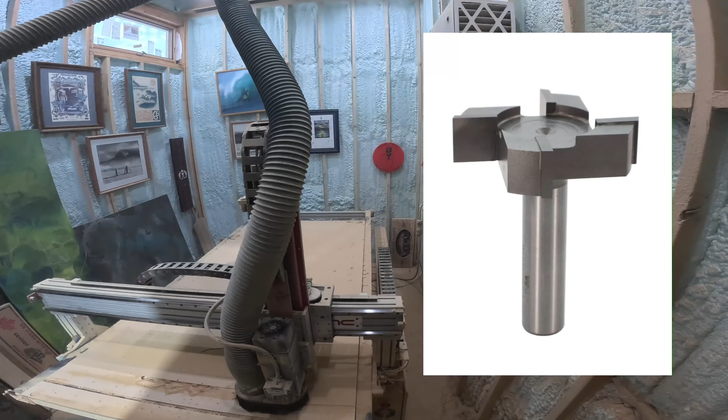Here you can see the vacuum system - it just doesn't keep up with it. This is a 2-inch surfacing bit, and I'll show you a picture of it. It just won't keep up with the dust, and it dusts this whole room out.

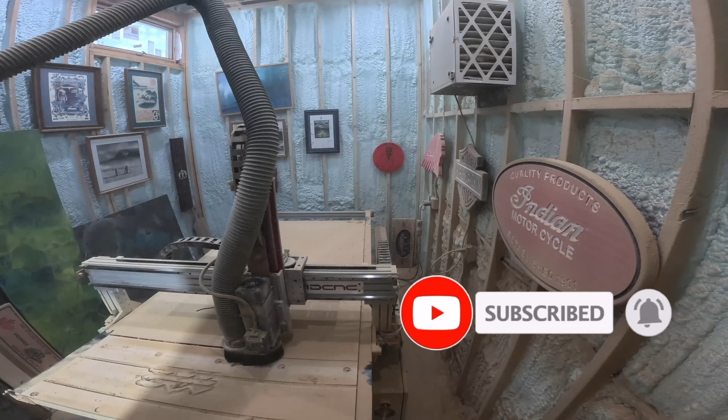You can see it's surfacing down to my original spoil board, and you can see the bolt holes right there. It's basically going down right above the bolts, just enough not to hit them. Then I'm going to glue a whole new piece on top of this and create the new vacuum board. I'll show you a picture right now.

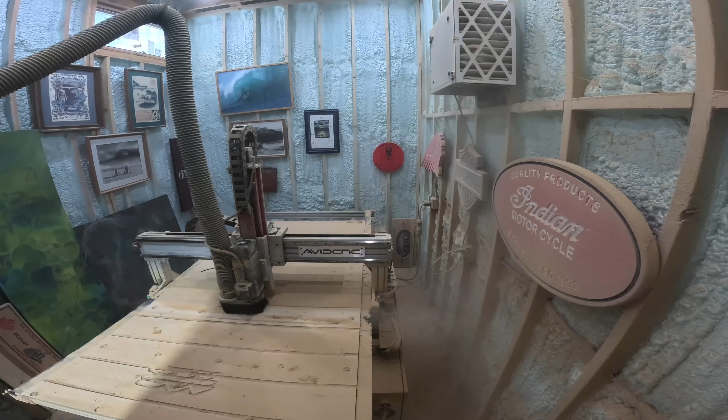We'll go into Vectric software, and I'll show you my 3D model of what I'm going to create for the top of this spoil board.

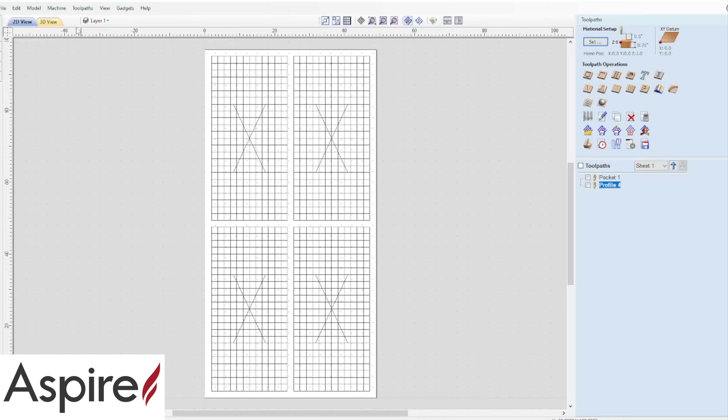Basically what I've created here - let's see where my holes are. Oh yeah, right there. I've just got two tool paths, and I'm basically going to use the same tool for both. Originally I thought about using a bowl bit, but I wasn't that impressed with it. So let me show you both these tool paths.

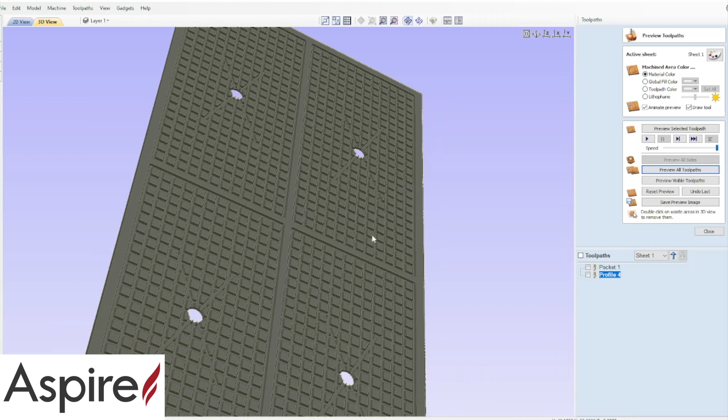We'll preview them - reset the preview and then preview all toolpaths. There you can see basically what I created. I'm going to just use one bit.

The first thing we're going to do is reset the preview, then run the pocketing toolpath. We'll preview this visible - this is going to basically cut the holes through it.

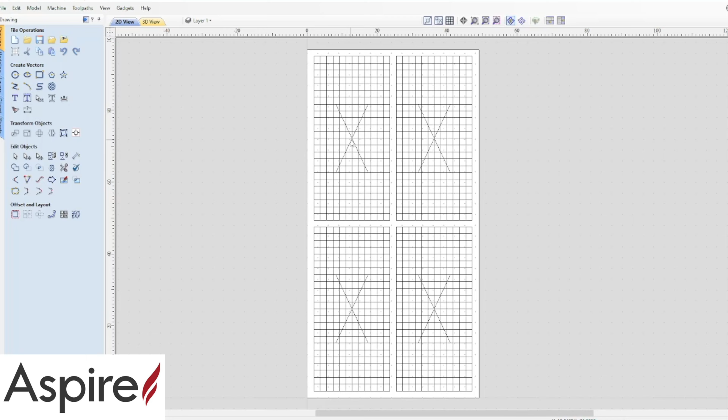Now let's go back over to the drawing for a minute. Originally, over in this 2D view, these holes right here - I had them just a hair too small. So I cut them, had to redraw them, and had to do it again. But I wanted it to be really tight.

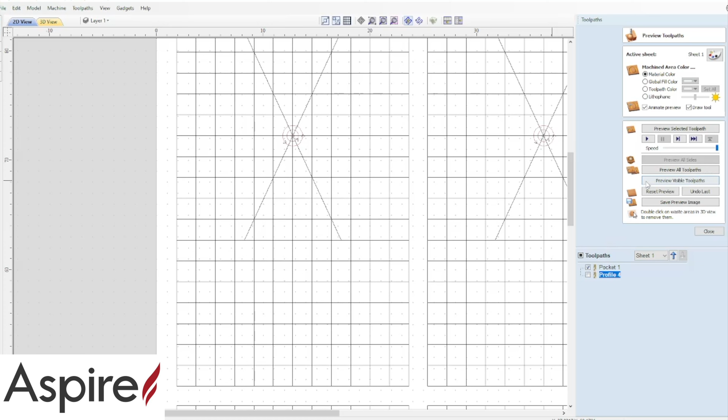So the 2-inch - here you can see the holes right there. That 2-inch hole was... preview visible. Oh, I'm on the 2D view, 3D view. This hole right here was just a hair too small, so I re-drilled it, recut it, and it's perfect now.

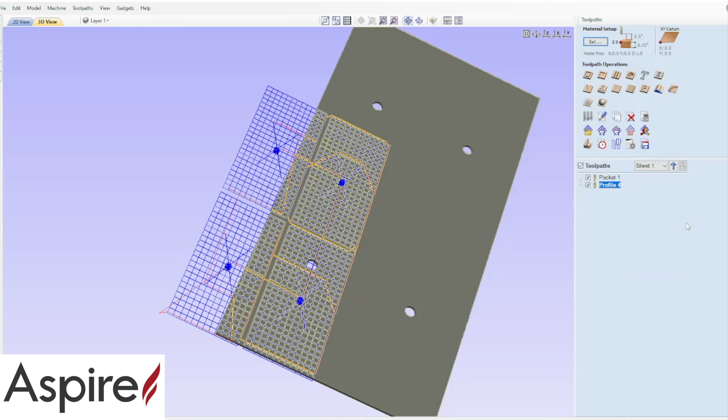So that was the pocketing toolpath, and then you had the profile toolpath. We'll go ahead and preview both of those - reset it, preview all. Basically this was all done with one bit, and I'll show you that bit right now.

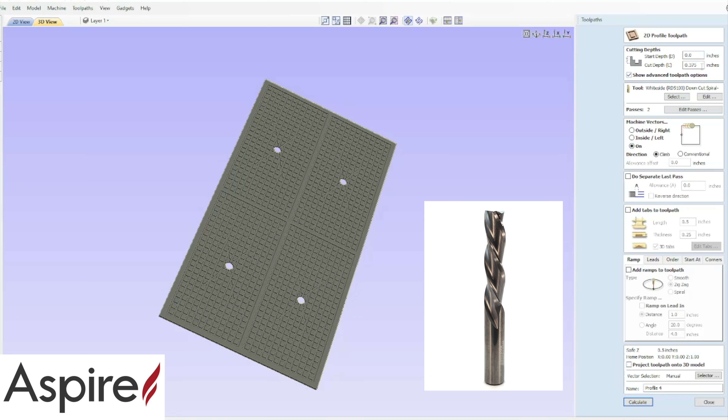This was a Whiteside bit, an RD 5100, and I'll show you a picture of it right here. I made two passes, ending up only about 3/8 of an inch deep - I didn't want it too deep. Most people run about a 1/4 inch wide, but I'm going to run it 1/2 inch wide and 3/8 of an inch deep.

I'll start off showing you the CNC cutting these 4 holes, then do a time lapse of cutting this whole thing out. If you want this file, just let me know and I'll send it to you. I did it all with one bit, and it really came out good.

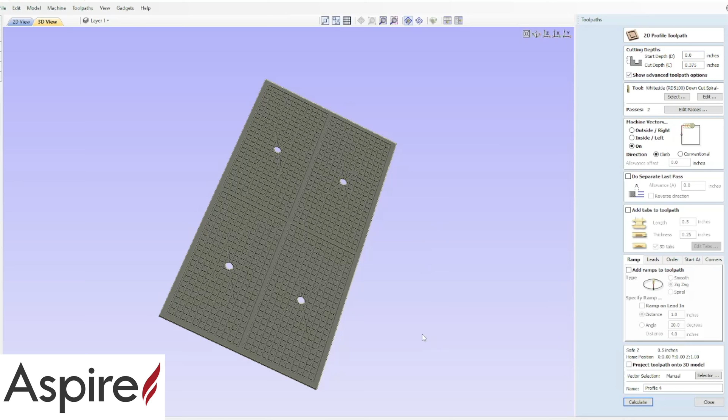Anyway, let's get over to the CNC. I'll do a time lapse of cutting this out, and we'll see if we can't get this thing done. Okay, the first thing we're going to do is change out this big spoilboard cutter bit.

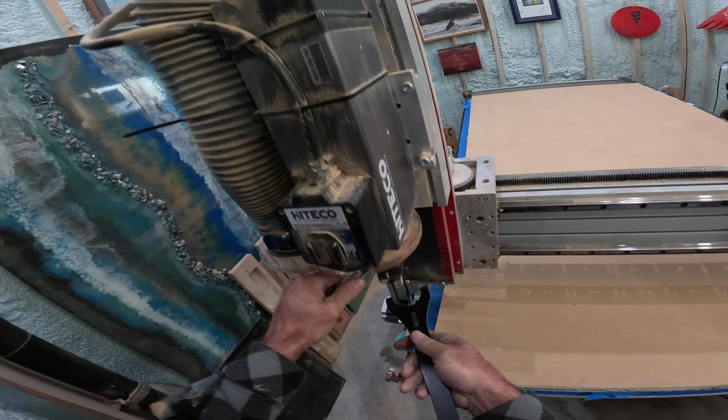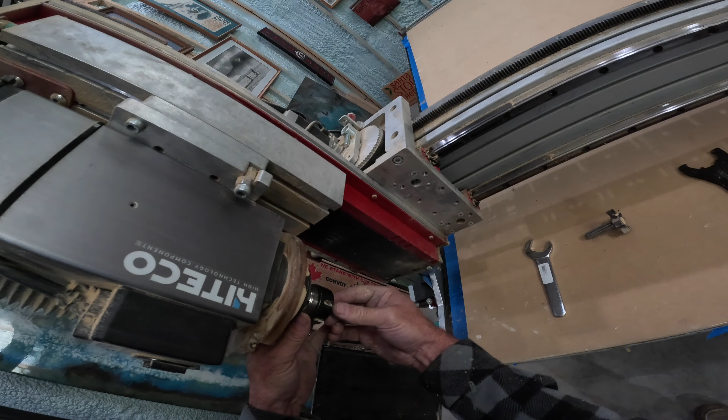And we're going to install this 5100. I didn't really show it, but this is a brand new piece of MDF glued onto my original spoil board. I basically used a lot of glue on both sides, glued this down and clamped it, put a whole bunch of weight on top, and let it sit overnight.

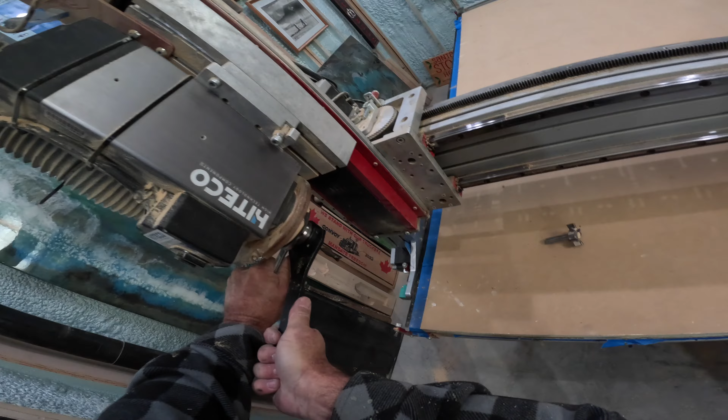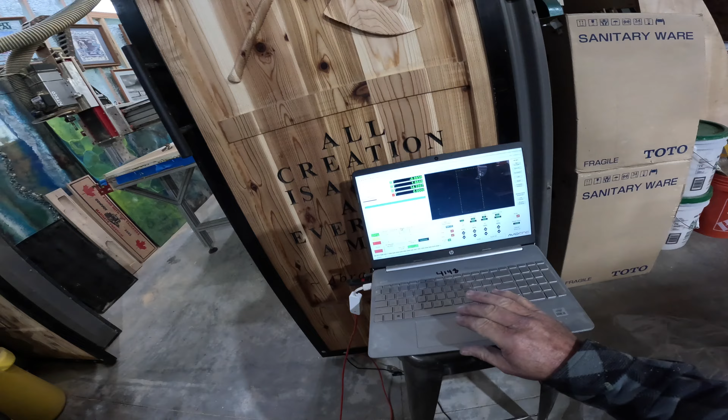You really got to put them on pretty tight. So that's all good. Now what we're going to do is come over here, bring that Z down, and do a touch plate here. Look at all that sawdust coming out. Take the soft limits off so I can go down further. Okay, we're going to put the touch plate over here.

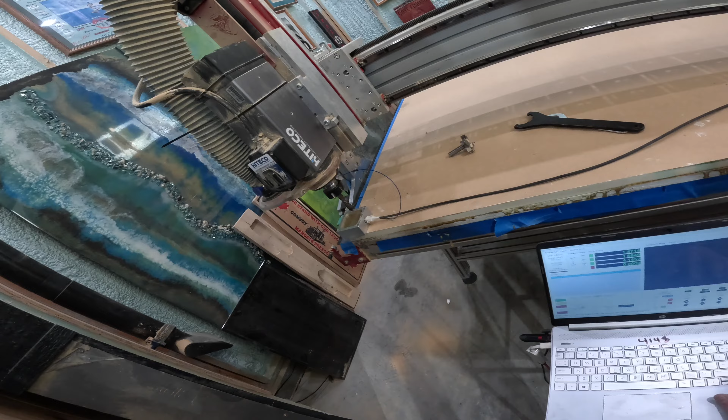I'll do a little jog in here. Bring this over closer. Okay, there, we're right in the middle. So we're going to start off.

We know that the diameter of this bit is a half inch. So we're going to go auto touch Z. We'll type in 0.5, and we'll go ahead and start from this corner. Now it's going to come down and touch that plate.

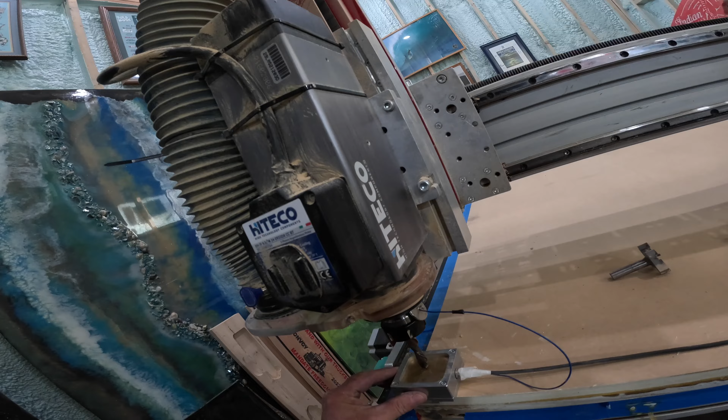And then it's going to do the XYZ. Now I believe it goes that way first, so you can see it's headed there. Then we want to turn it to the X position, and we'll come across. This ensures that you put these holes in the exact spot, basically referencing off your material.

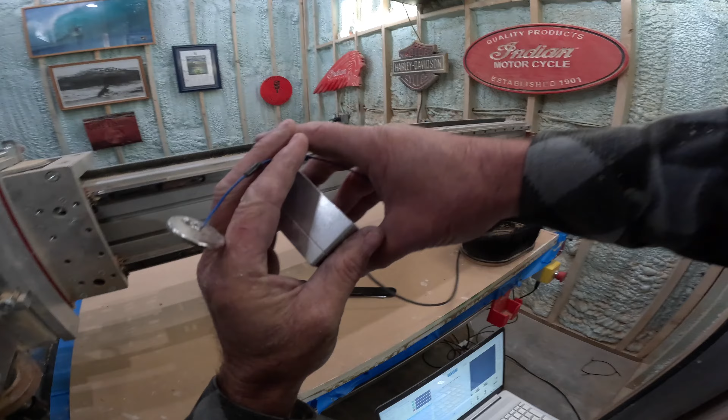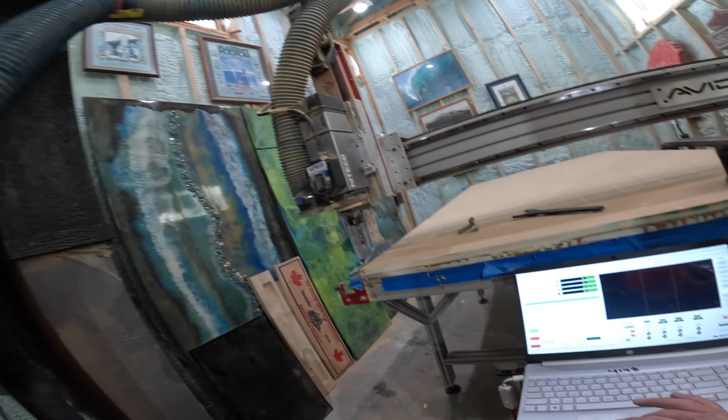Okay, the touch plate's all done. The next thing we're going to do is load the program. First we're going to raise this up a little bit because I got to put my vacuum. Need to put this vacuum thing back on. And then we're going to go up here, enter the file.

Open G-code. We know it's this pocketing toolpath. We'll open it up, and you always want to make sure and look and see what it's doing. That's all good, but first thing we need to do is warm up our spindle. So we're going to go ahead and warm it up first, and it'll start spinning for a few minutes. Okay, the warm-up is complete.

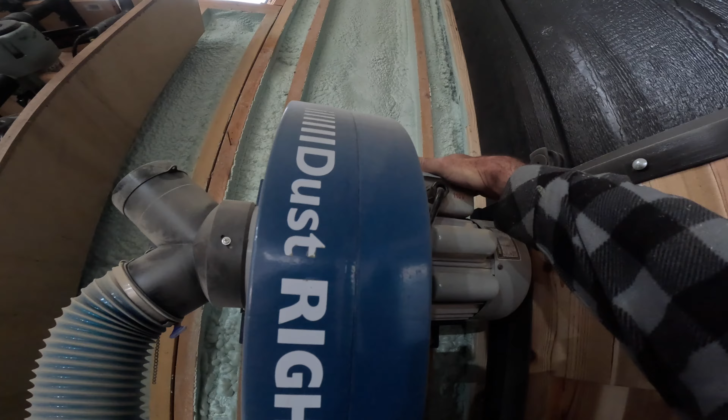We're going to go ahead and get our vacuum going. Make sure we got good suction.

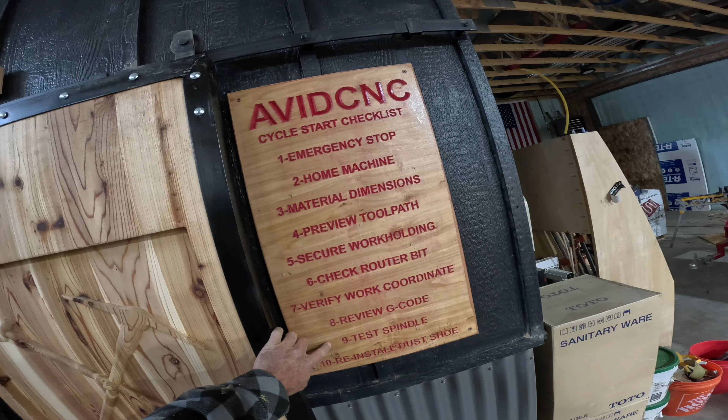And we've already, let's check our checklist. We know where our emergency stop is. We homed the machine, checked our material, previewed the tool path, secured the work holding, checked the router bit, verified the coordinates, reviewed the G-code, tested the spindle, reinstalled the dust shoe. So we're ready to go. Here we go, we're going to hit cycle start, and hope for the best.

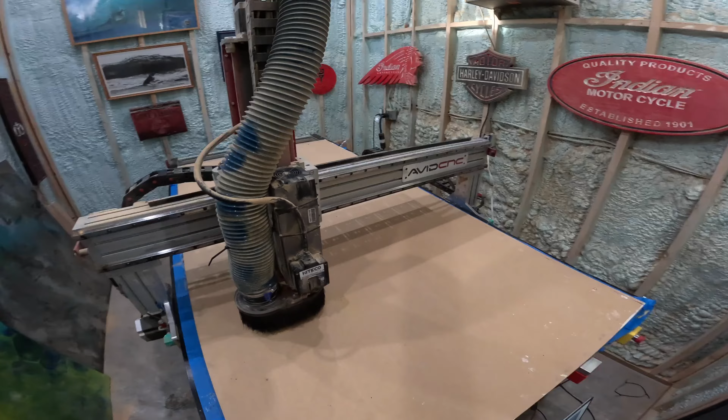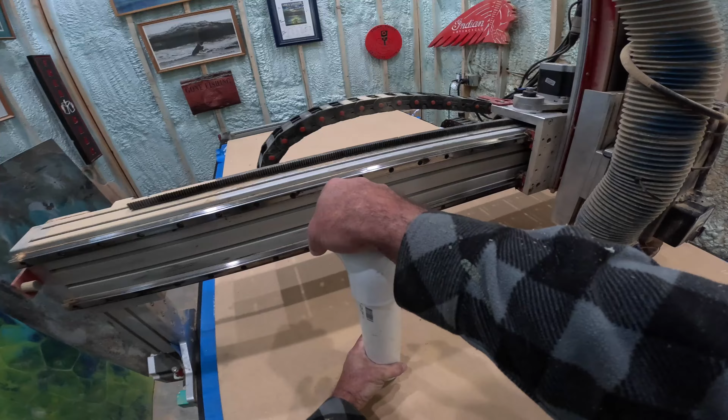Here's where I find out that it's just a little too tight to go in there. So I had to let it run to drill all four of those holes, and then I redrew the circle just a hair bigger, and the next go around it fit perfect. Just a little bit.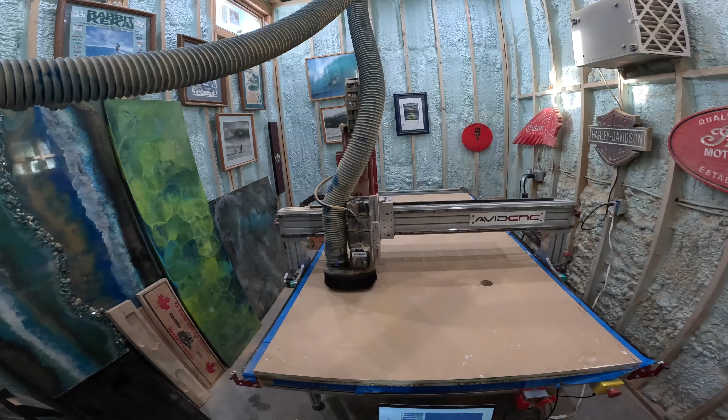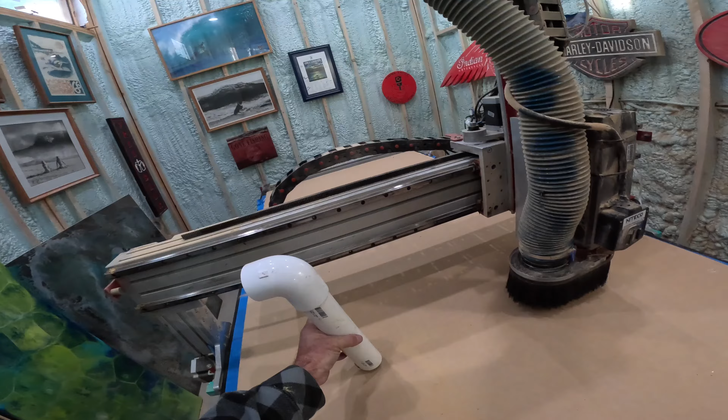And here you can see it fit just perfect, nice and tight. And that's going to be good for this vacuum table.

Once the holes were done, it was time to do the grid. I set my GoPro up to do a time lapse. I didn't realize how much battery it would take and how long it would take. It didn't take that long, but it took a few hours to do this whole grid, and I think it ran out of batteries right around here.

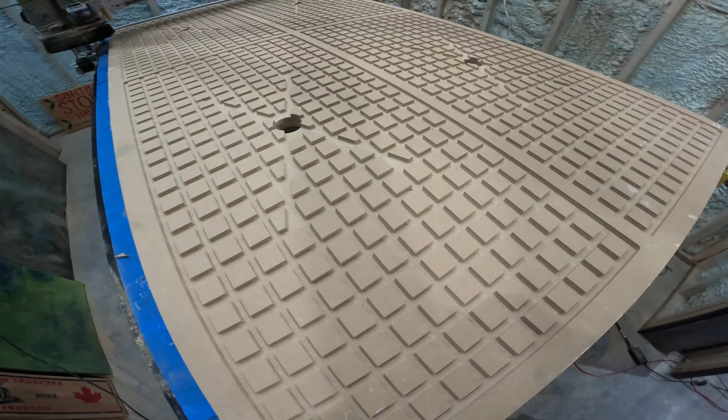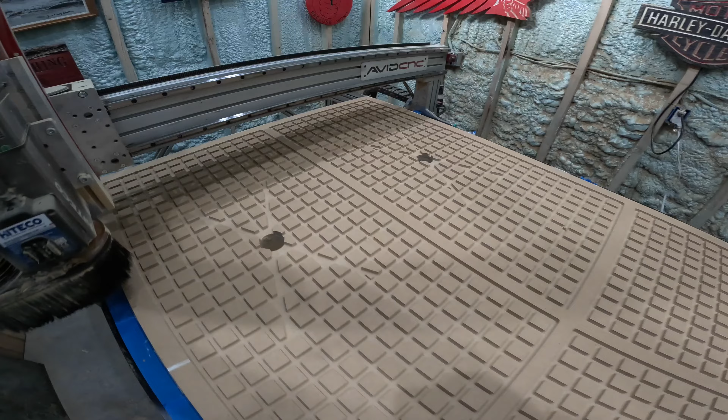Now here you can see the grid completely done, and I must say it came out pretty nice. Now I've got this thing. If in a perfect world, I would do this out of like a 3/4 inch solid plastic where it wouldn't leak any air.

But since this is MDF and it is going to be porous, I'm going to seal this whole part with some Zinsser wood sealer. And that's what I'm going to do right now.